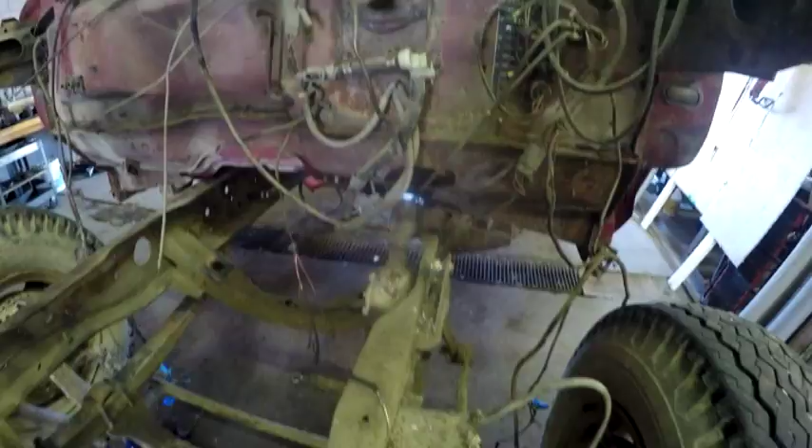Okay, Ford F750 haul truck build. I'm over here at the truck firewall. What I wanted to show you was the steering column. This is the steering box, and that steering column is out. I finally got the steering column out, but I never got the steering wheel off so far. So I am very close to being able to pull this cab.

What I have to do is deal with these vacuum lines that were for the brakes. There's a vacuum line off of the engine supply that went down to feed a vacuum booster for the brakes. I have to pull this off because the vacuum booster is connected to the frame, not the cab or chassis, so I've got to get this off.

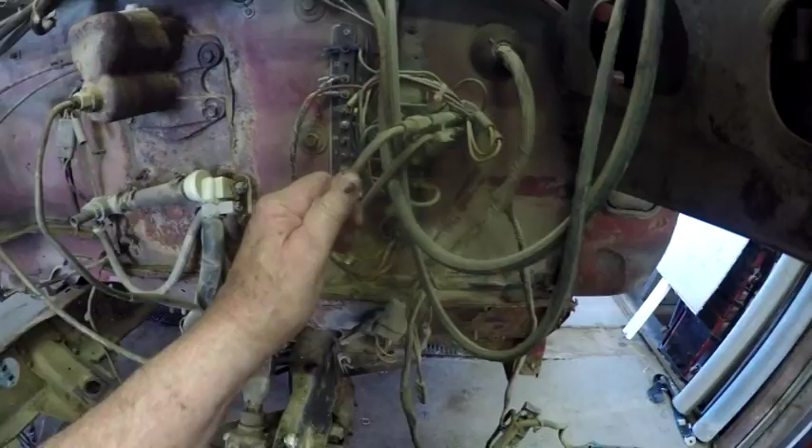These are the brake lines that go down to that cylinder. There's another master cylinder down on that vacuum chamber assembly that is connected to the frame. These brake lines go to that line lock type of thing I've shown you before in the cab, where I found a line lock.

I'm going to leave that line lock in there and hook it up to probably the front brake, so I can have my parking brake lock the rear wheels, and this line lock will lock the front wheels. That way, when I'm driving pieces of equipment up on the trailer, the truck doesn't try to move back and forth.

So the vacuum lines have to come off, and these brake lines have to come off. Now these lines go to that...

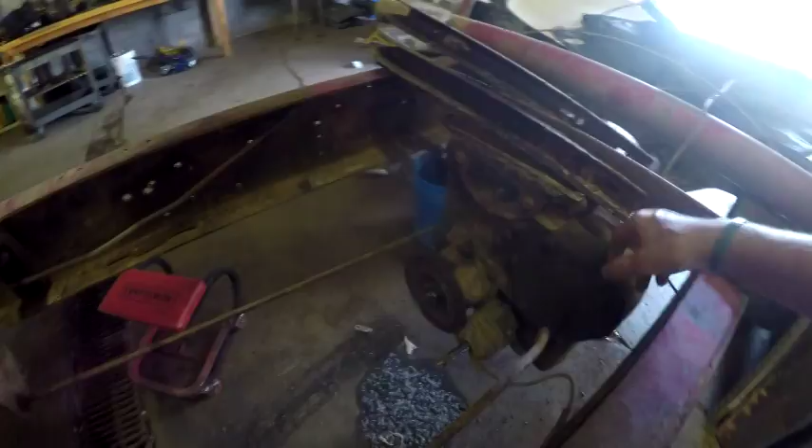...drive shaft disconnect. The existing original transmission in this truck had a PTO, and there's a drive shaft disconnect. So to engage the PTO, what you would have to do—I'll bring you back here and show it to you—this is the drive shaft disconnect. You would disconnect the drive shaft, so it would spin in the front but be disconnected and wouldn't spin the rear back to the axles.

So to engage the PTO, you disengage the drive shaft, put the transmission in fifth gear, and it had—let's not call it cruise control—it had a hand throttle cable so they could boost the engine RPMs up. I'm assuming that PTO drove a pump, a fire pump for the tanker. So you'd boost the RPMs, disengage the drive shaft, engage the PTO, put the transmission in fifth gear, and run the pump.

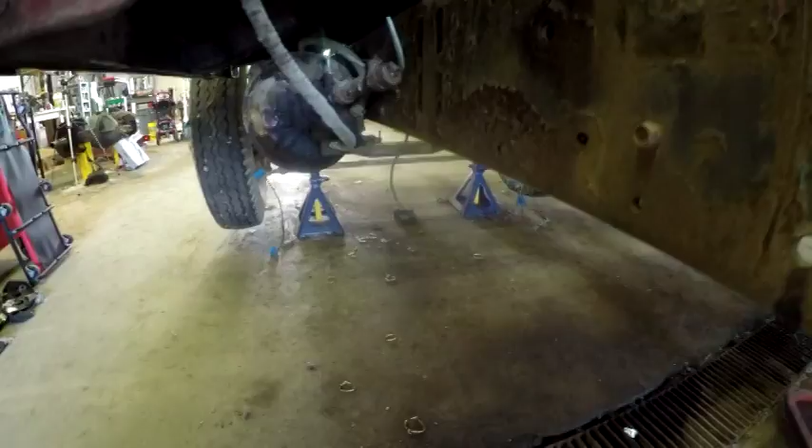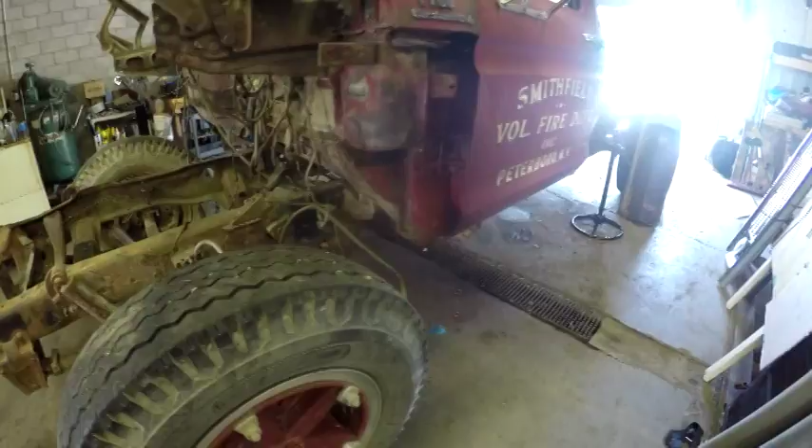So those things have to be disconnected—just so you know that's that brake vacuum assist brake system. Once I get those things disconnected, I can pull the cab off and start getting the frame prepped for painting and for engine mounts, stuff like that.

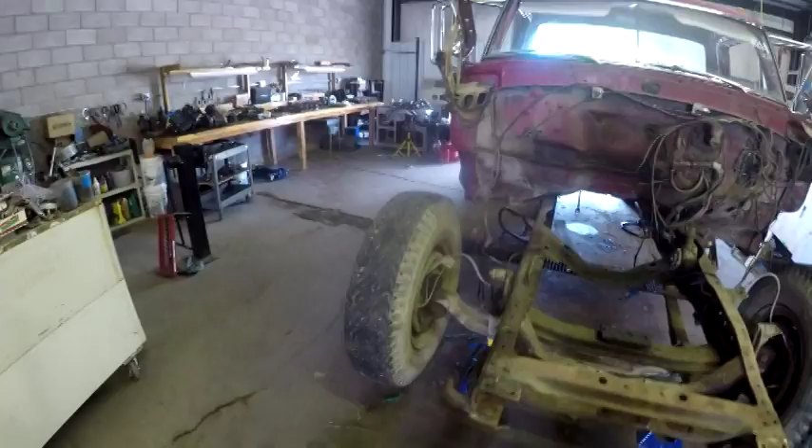So I'm going to throw some clips in here. There's some clips of me working on the cab. I don't have video of me actually getting the steering column disconnected, but there are clips of me working on the cab. As you can see from the shop, the engine and transmission are gone. I'll delve into that in more clips, so I'll bring you back.

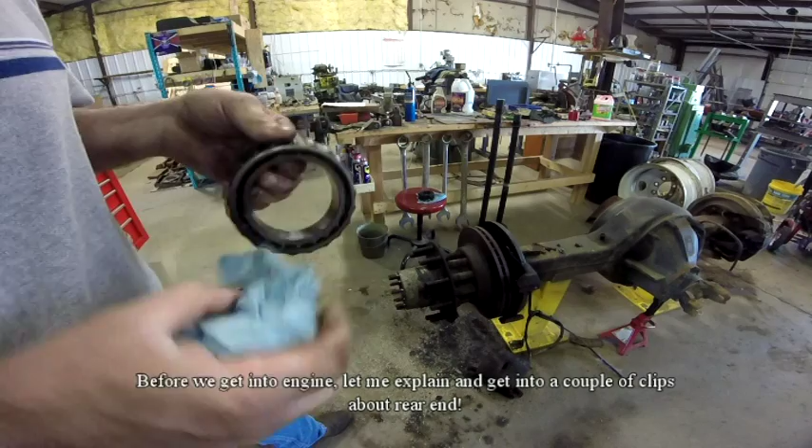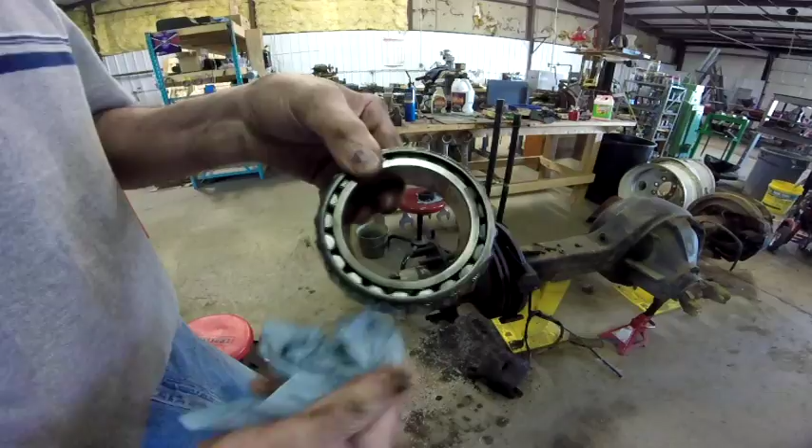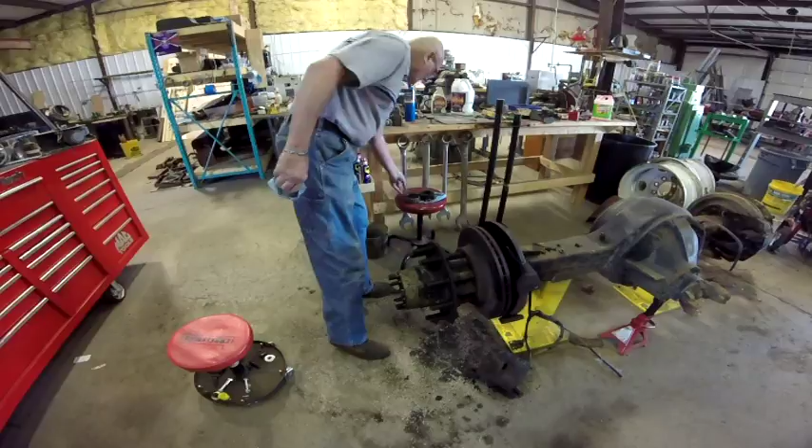Okay, so over here at the rear end, I just decided as I was passing by to work on that a little bit. Got the outer bearing off, about ready to take the hub assembly off for the rotor. Hopefully.

What I'm going to do is make a spot up on the bench to set this up on there and work on it.

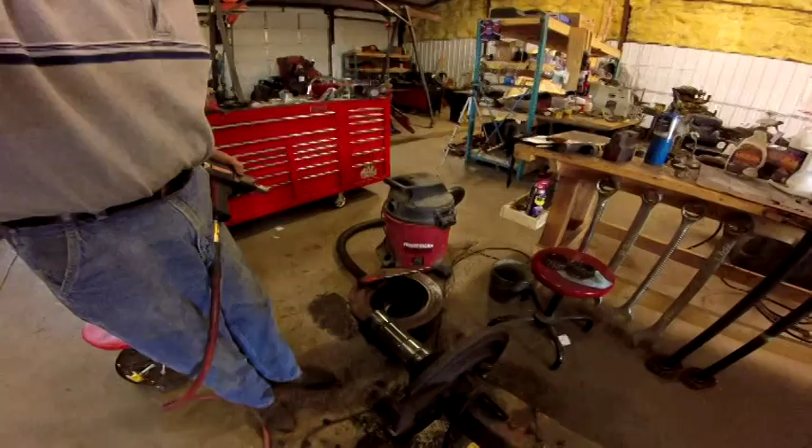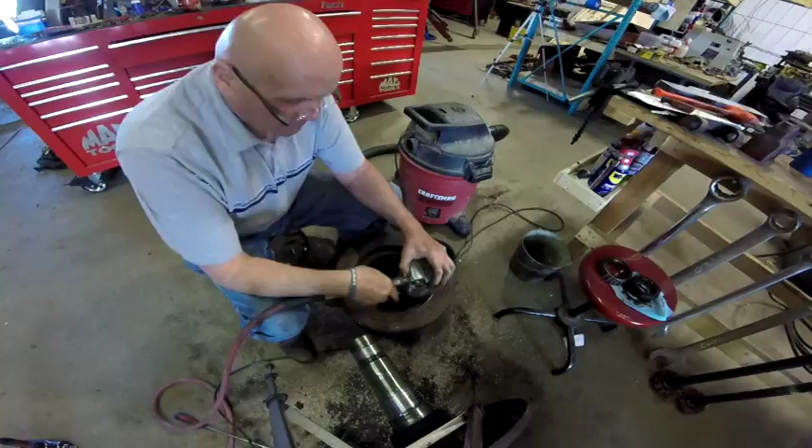Okay, so what happened here is I got two of the bolts out with a 1/2-inch impact wrench, but it would not take the rest of them out. So I had to go to the 3/4-inch. Came right off.

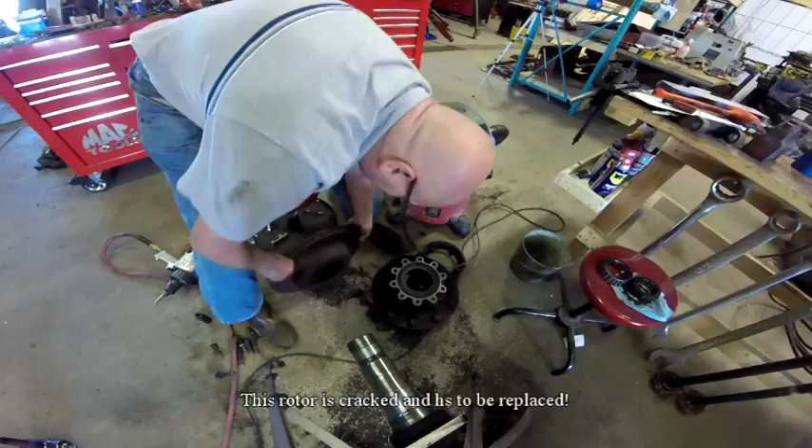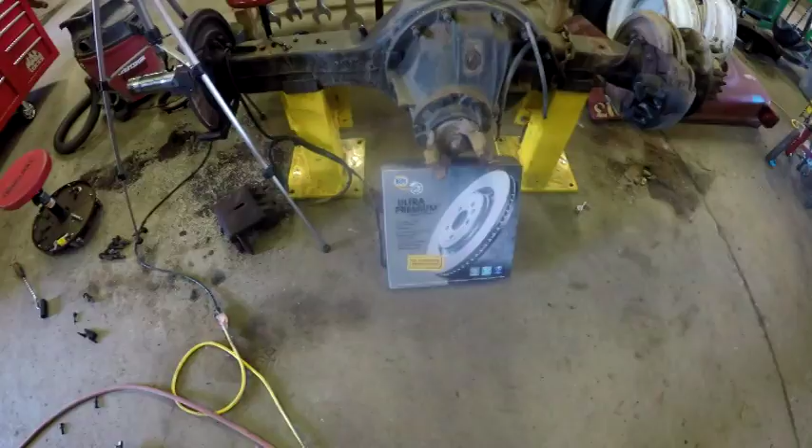That's cool. Okay, so as in previous videos, you saw that I got that rotor off and the hub off, and a part. I went down to my local NAPA store and they had a rotor in stock. Now I also asked them for the inner seal on the thing too.

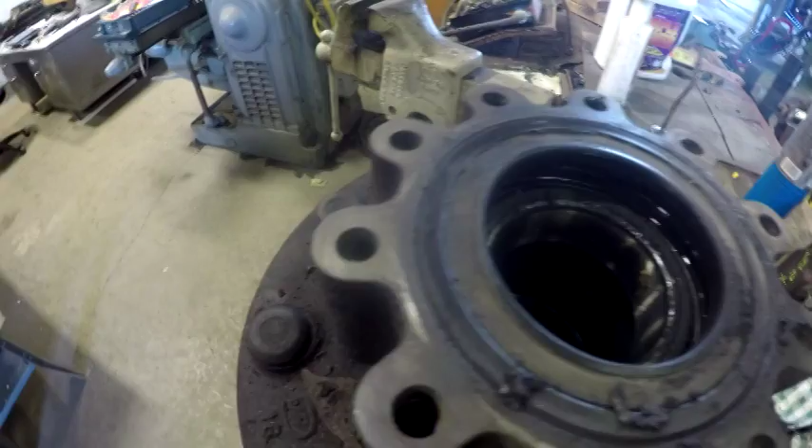And when I came back, I was doing some other things here in the shop, and I went to look at this inner seal, and the one they gave me was too big—way too big in diameter. Now I'm kind of baffled here as to... sorry, you weren't in position... I'm kind of baffled here as to what to do on this thing.

Most parts stores go by reference numbers of the vehicle. You tell them the vehicle, they have a reference number for it. If you don't know what the vehicle was, and again, this rear axle was either out of a 2004 or 2005 F750. I know the axle number, the model number, I even know the serial number of the axle, but parts places don't reference that. They reference make and model of the vehicle. So I'm kind of stymied as to what to do here.

They said, well, pull the seal out and we may be able to match it. Well, if I pull the seal out, it gets destroyed. If they can't match it because it's been destroyed, well, for me taking it out isn't going to do me any good. So I guess what I have to do is figure out a place that sells seals. There is a number on here, and I gave him that number and it didn't show up as being anything.

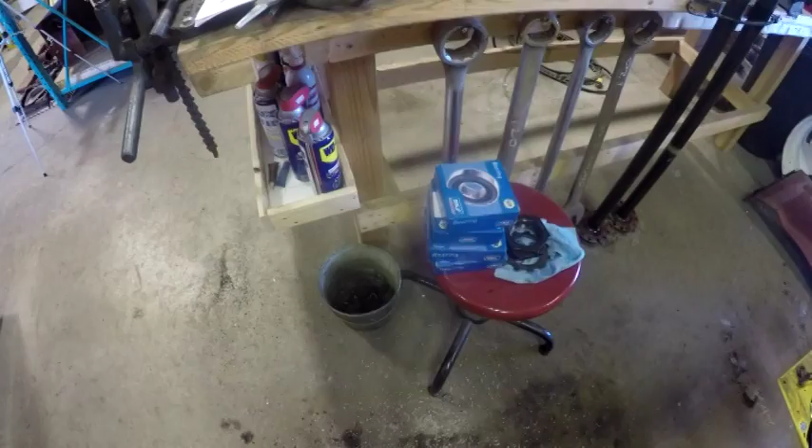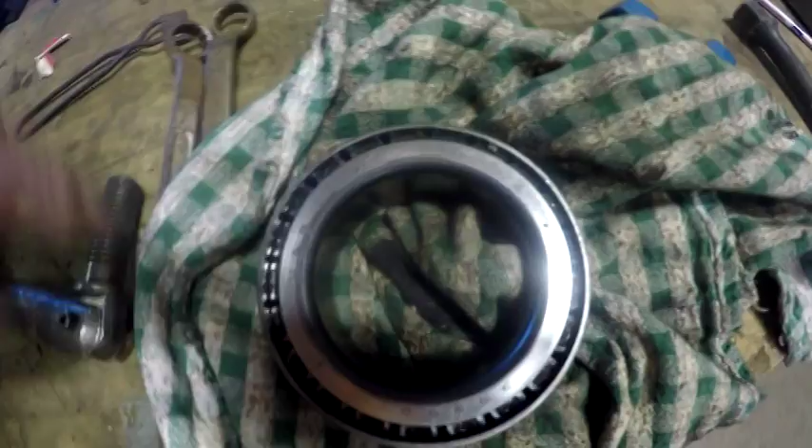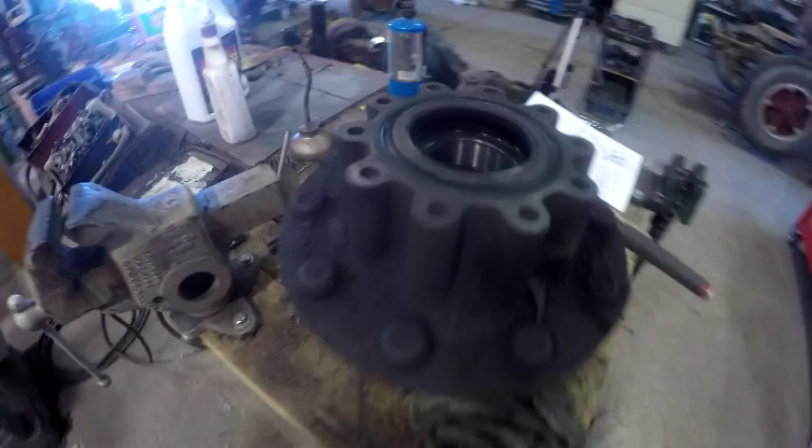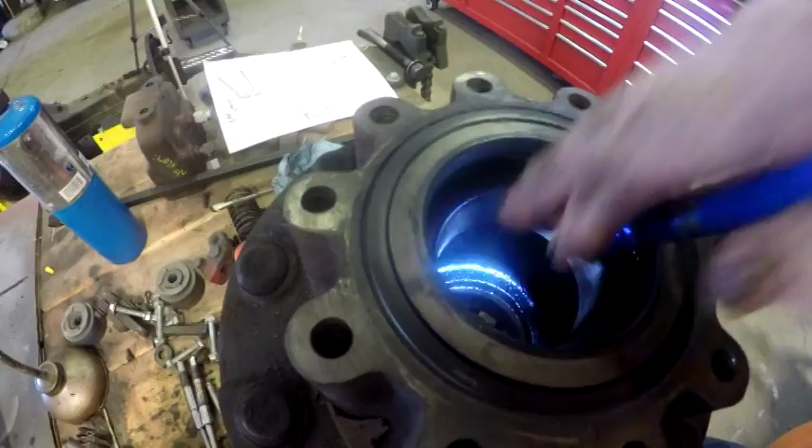I just wanted to show you these bearings for the rear end. I was able to get the bearings even though I haven't gotten the seal yet. I was able to get the bearing because off of the old bearing I got a manufacturer and I got a number. So that's the outside bearing - let me get a light on it. Inside bearing, same manufacturer, you see it right there, Timken, and the number is over here. So what I was able to do is get the number, and my parts supplier was able to match that.

Now I still haven't found these seals, but I'm still working on it. I actually got an email into Spicer, Dana Spicer rear ends, and I gave them the model number and the serial number of the rear end to see if they can help me with the seal.

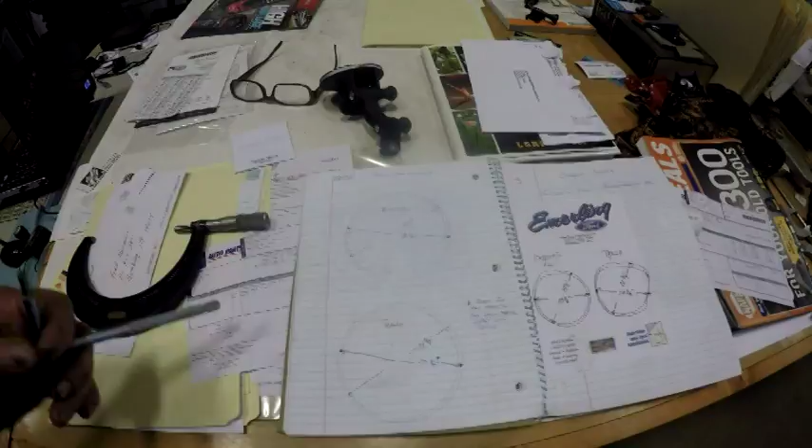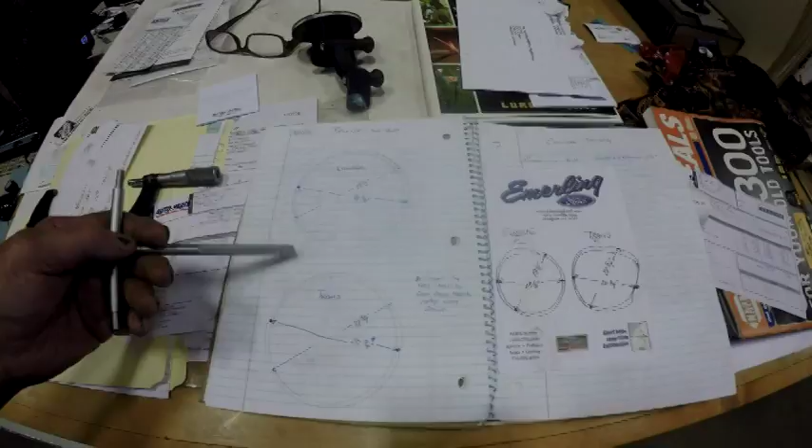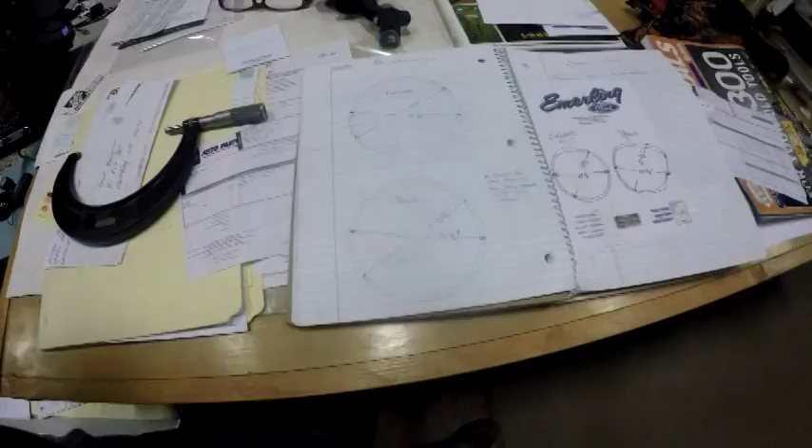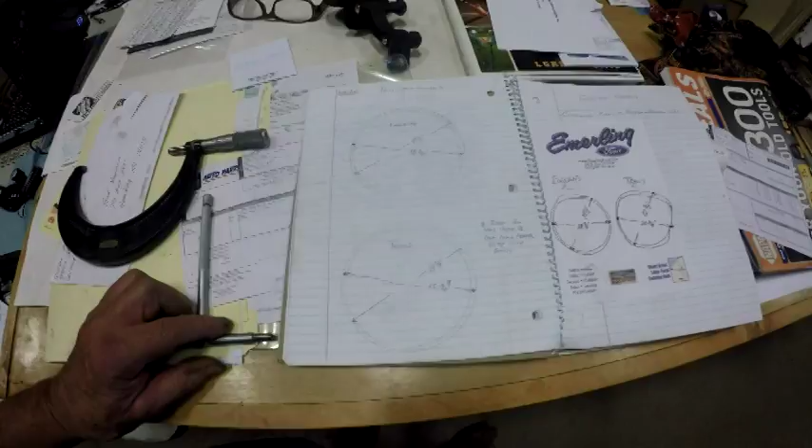Bring you back, so trying to keep this as brief as possible. The reason the engine and transmission are gone is I had gone down to that truck salvage yard, and he said to me, take measurements on the bell housing or flywheel housing off of the engine and the housing off of the transmission, tell him what sizes they are, and give him the model number of the transmission. So I did that, and I went down there at the end of May. I get down there, and the guy says to me, can you bring the engine and transmission down? If we had them down here, I can put them in my shop, and that way we can assure that what we get is going to fit. So I said, yeah, I can do that. Now, you got to understand this place is probably about 20 miles away from me.

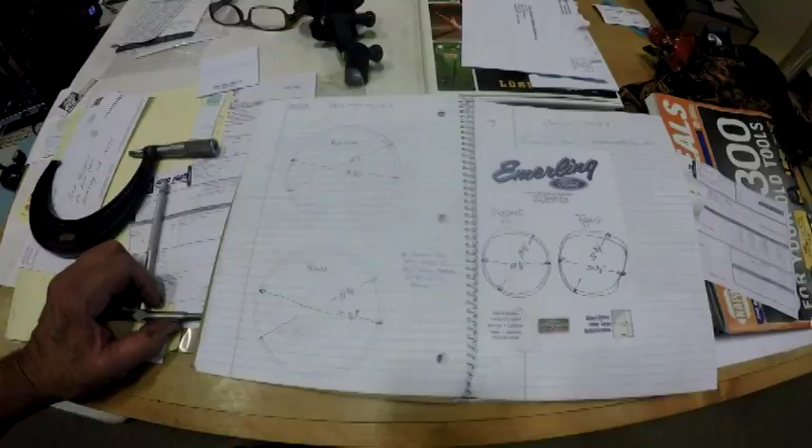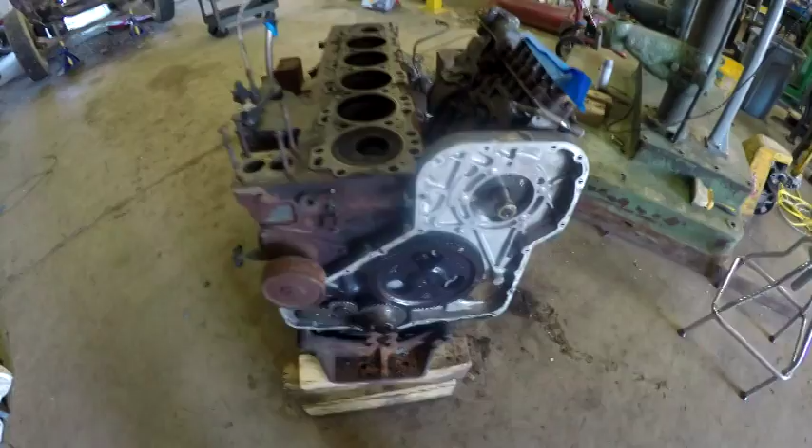So I go back, and this is where we're going to start - on me getting preparations to move the engine and transmission down there. So off camera, what I did was I pulled the gear off of the P-pump. I've also taken the head off and taken it over to the workbench. I'm going to pull that P-pump off right now. What I'm doing is prepping the engine to take down to the salvage yard.

And I'm taking it down to the salvage yard because the guy down there wants me to bring the engine and transmission down, let him store it so he can find the correct adapter, the transmission bell housing adapter, to fit between this engine and the transmission that I've got. So I'm doing this because it has to be torn down, but also I'm doing it to facilitate getting the engine down there.

What I'm going to have to do is form it up on a skid, get it onto a skid, and stabilize it, both the engine and transmission. The transmission is sitting on a skid, but I'm going to have to stabilize both of them so that I can throw them in the back of my truck and take them down there and let him have them for a little while he finds the correct adapter plate.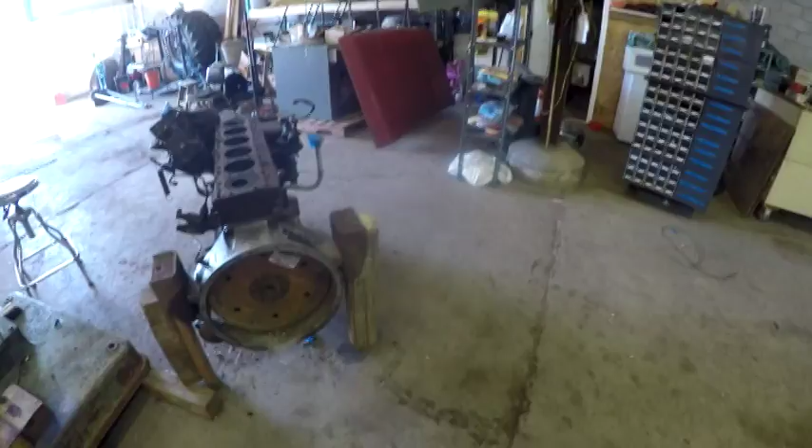A lot of stuff has to go into it. The distance from the shaft sticking out of the transmission - I'll take you over there and show it to you - the shaft sticking out and lining up with the flywheel.

Now, as you can see from that flywheel, that's not the correct flywheel. That flywheel is probably for an automatic transmission, and I'm going to have to get another flywheel that will adapt into that flywheel housing, bell housing, and then get an adapter for the transmission that will adapt to this bell housing.

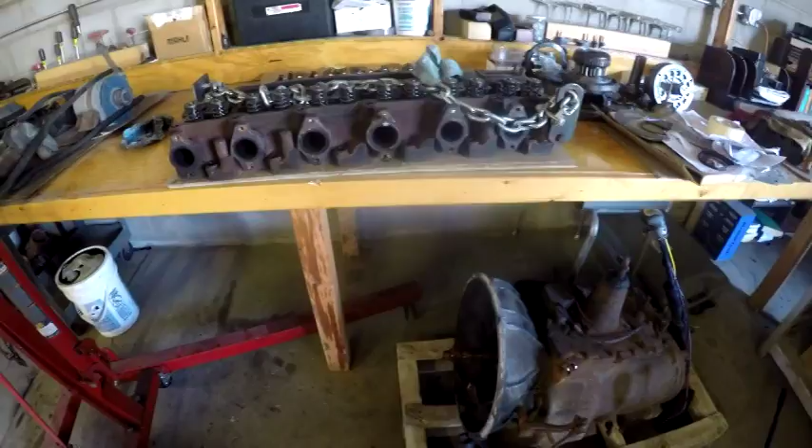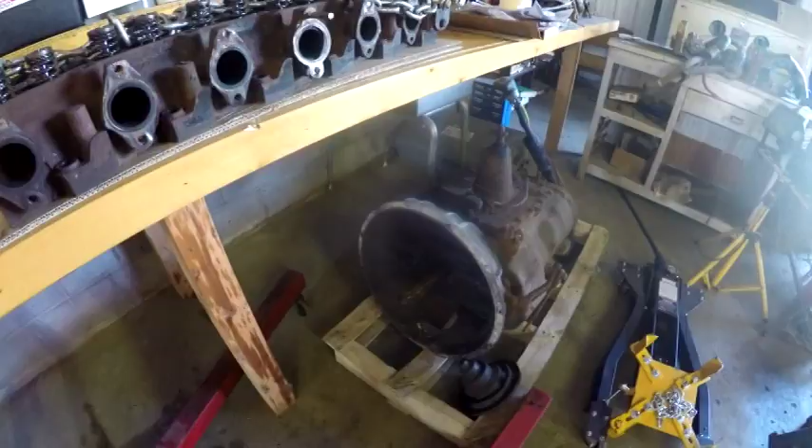So as I said in the previous video, here is the head. It's over on the workbench. I've kind of reorganized the workbench to get it ready, but I have to get an adapter.

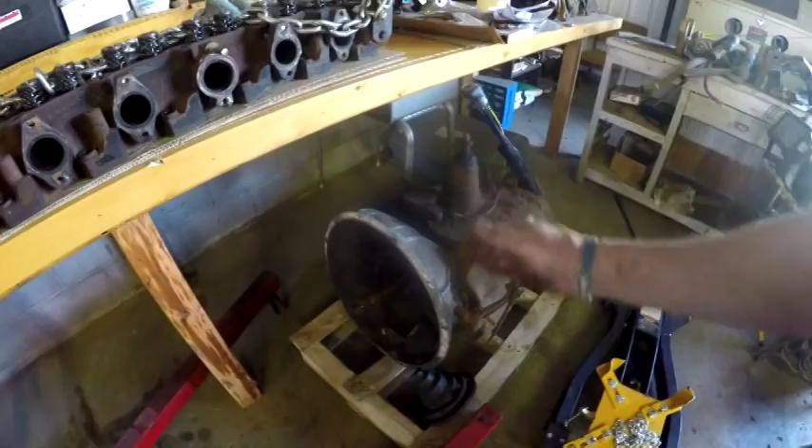This bell housing, transmission bell housing adapter, has to come off of there, and the correct adapter has to go on. This bell housing is different in diameter than the bell housing on the engine, so I've not only got to get the correct size, but I've also got to get the correct distance out away from the end of the flywheel.

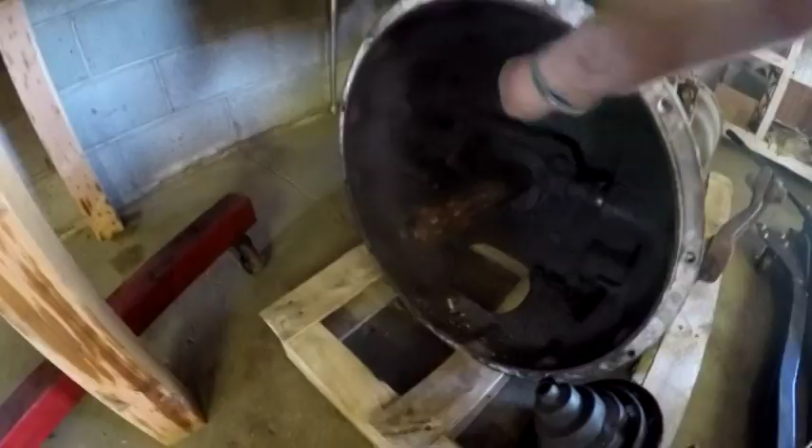Sorry, I was thinking of something while I was doing that. I was just looking to see if that clutch brake was in there, and yeah, it is. The clutch brake is, well...

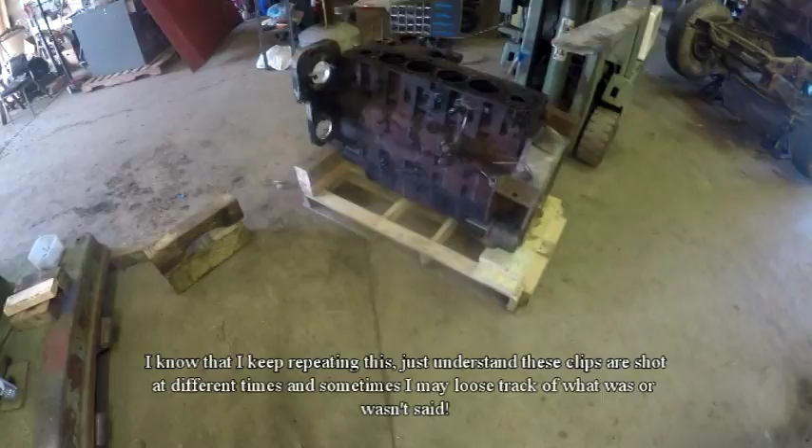I'll explain it later. Okay, so if I haven't told you - no, I've mentioned this in other videos, other video clips - so I'm not sure whether that clip is going to go first or this is going to be the new clip.

The last time I went down there with the measurements for the engine housing and the transmission housing, he told me it would be really helpful if I could bring the engine and transmission down to him and let him set them in his shop so he can have them there to reference, so he can adapt or find that adapter housing. So that's what I'm going to do.

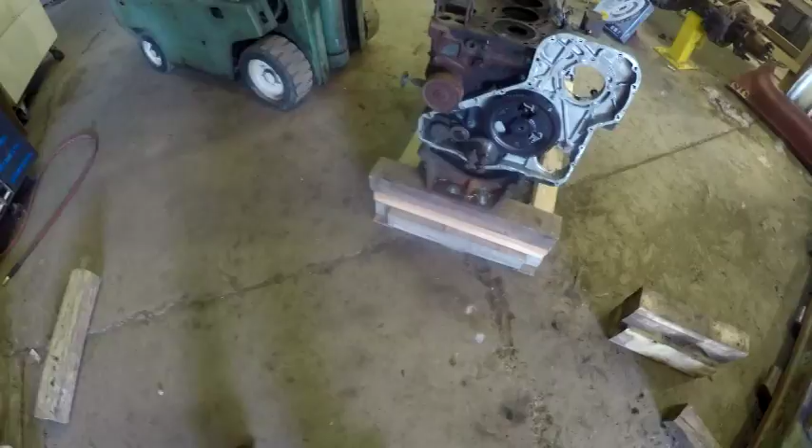I've got the engine on the skid, and I'm going to be putting it onto the truck along with the transmission so that I can take it down there, and he can keep it for however long he needs - like a week, I'm assuming. He'll have the engine and transmission down there, and he can get an adapter housing that fits from this to the transmission.

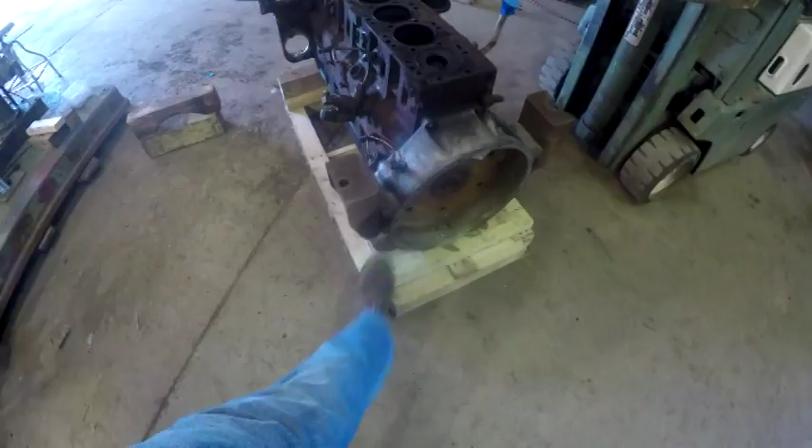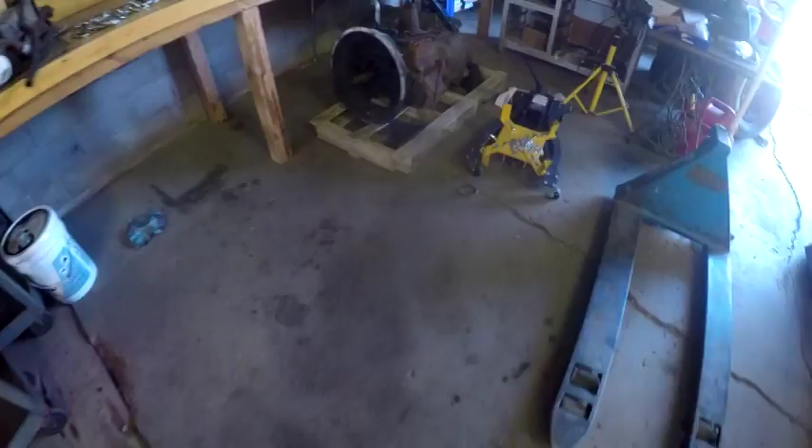Now, as you've probably seen in other videos, the transmission is already skidded up, on that pallet right there. Now I'm going to take the shifter lever and that boot off of it, but there it is - it's all ready. So I'm going to set that on there, and then set the transmission, or the engine, up in it.

It's going to be a lot of weight in the truck. Between this, and even though the engine is fairly bare, we're still probably looking at a ton and a half. So I'll bring you back when I get it loaded.

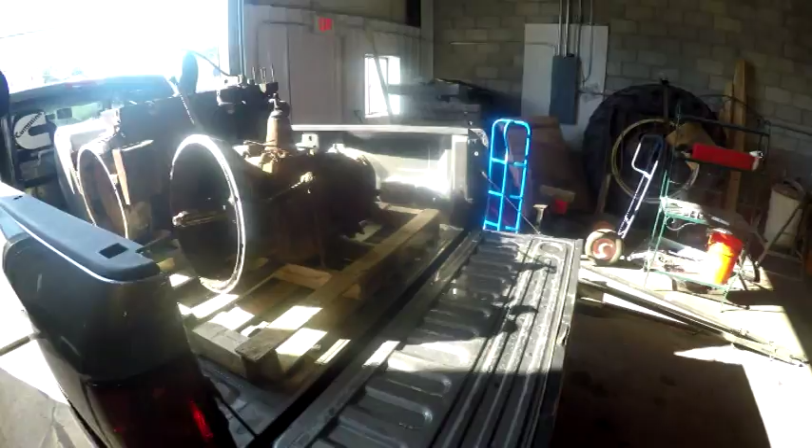Okay, hopefully you're not getting blown up by the light of the garage door, but here's the engine and transmission loaded in the truck.

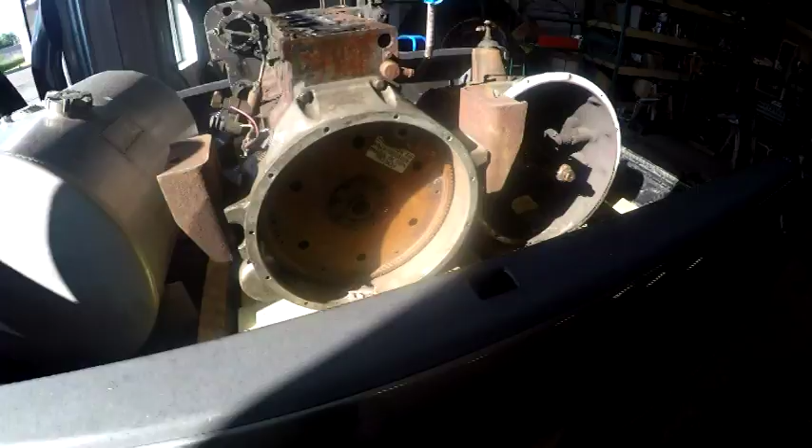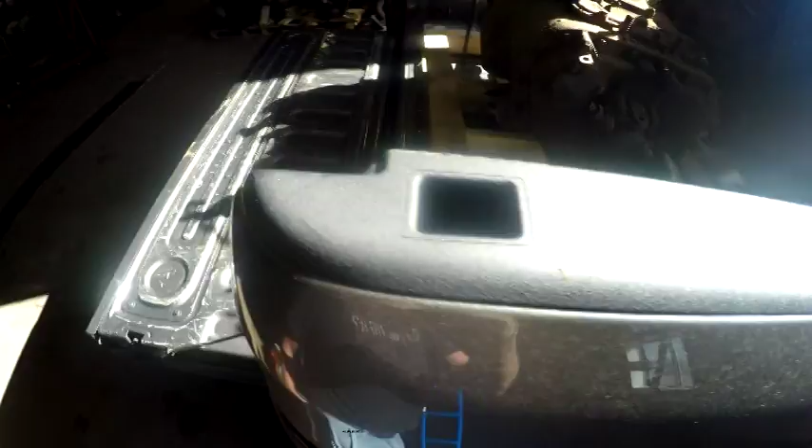So I've got airbags on this truck, and that's probably why it's not dipping down way too much. I mean, it is down, but as you can see from the springs, there's still a curve in the springs.

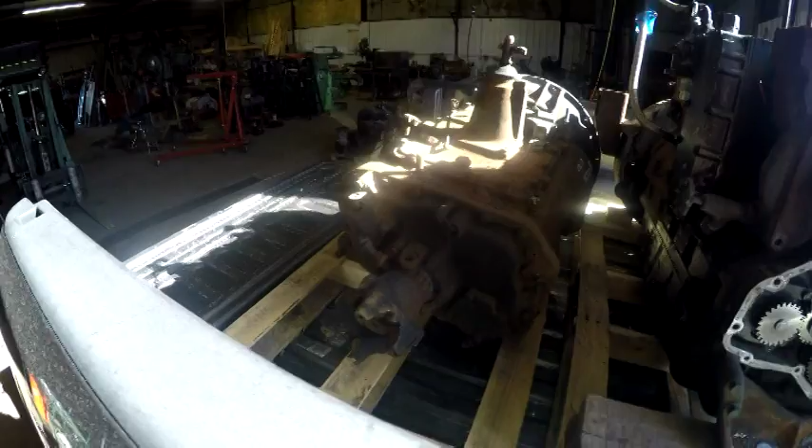Okay, I'll bring you back. I'm gonna try and take you down there and be able to show it to you.

Okay guys, this video is getting too long, so I'm not going to show you any of the cab work. I left you off with the engine and transmission in the truck. I'm going to show you a couple of clips from down there.

Now, I would love to be able to film the inside of this office just so that you could see it and be as amazed as I am. The guy that I deal with, the place is called Casey's Salvage Yard, and it's Casey that works the counter, the parts counter.

There's an office with a couple of women in there that do bookkeeping, and I'll explain why I say bookkeeping after I explain Casey. Casey works a parts counter, and when you walk into this place, it looks like a paper factory exploded into his office.

There are sheets of paper stacked, no joke, in some cases 2.5 feet high. I'm talking about stacks of notepad paper. He does not have a computer at his desk. Casey is fairly old, if I had to guess, probably 80. Gets around very good, and the guy is just a walking encyclopedia of trucks.

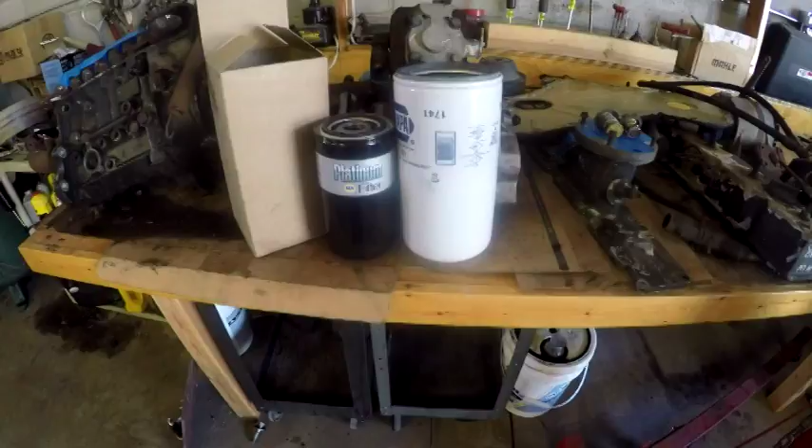I'll get you over here to the workbench. I just wanted to show you the filter - this is the oil filter for the 8.3. I have to tell you, it's pretty expensive. But I wanted to show you a comparison - this is a filter for my 6.7. Show you a comparison between the two. The filter is pretty big and expensive.